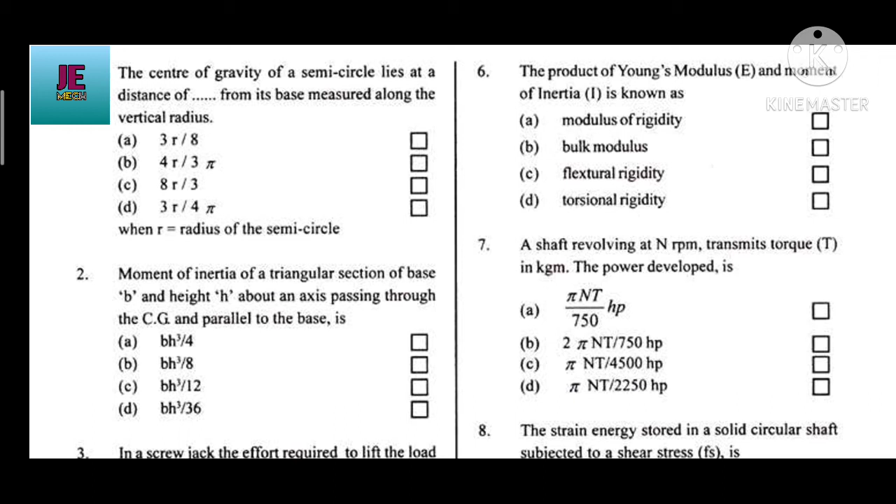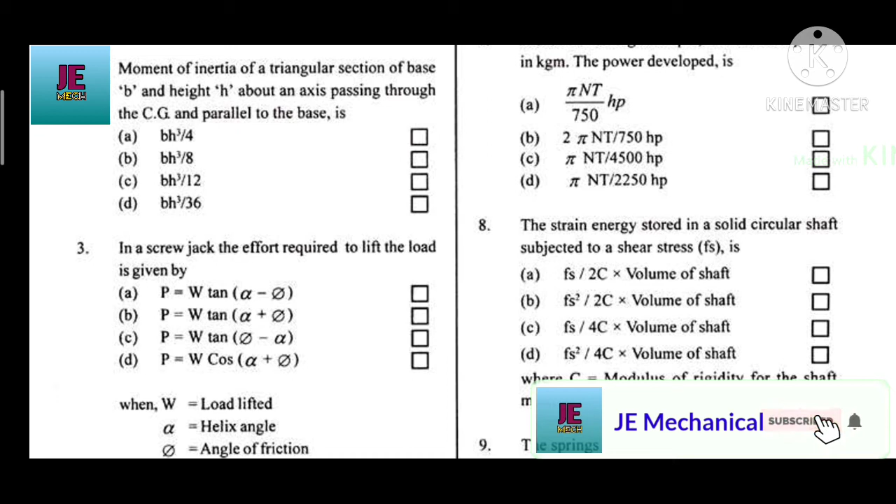B and height h about an axis passing through the CG and parallel to the base is bh³/36. In a screw jack, the effort required to lift the load is given by P equals W tan(alpha plus phi). The angular velocity in radian per second of a body rotating at n rpm is, answer, pi n/30.

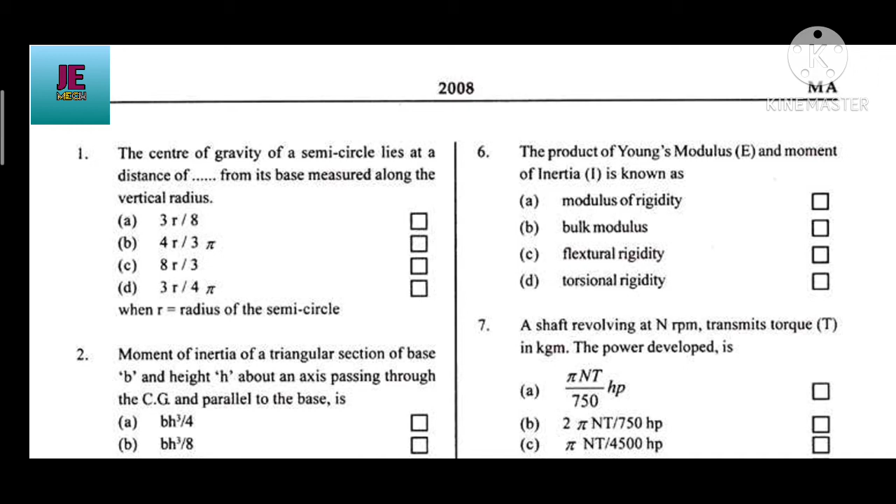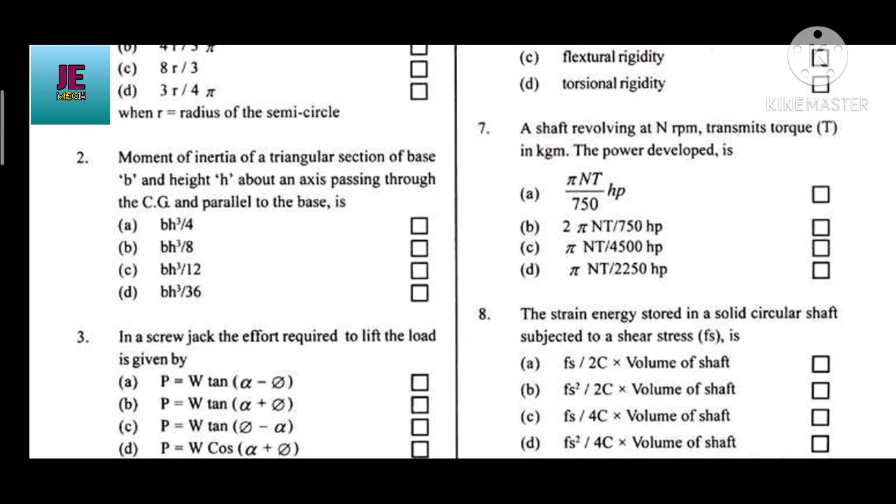A shaft revolving at n rpm transmits torque T in kgm. The power developed is pi nT/2250 hp. The main formula is 2 pi nT/4500, so simplifying it gives pi nT/2250 hp.

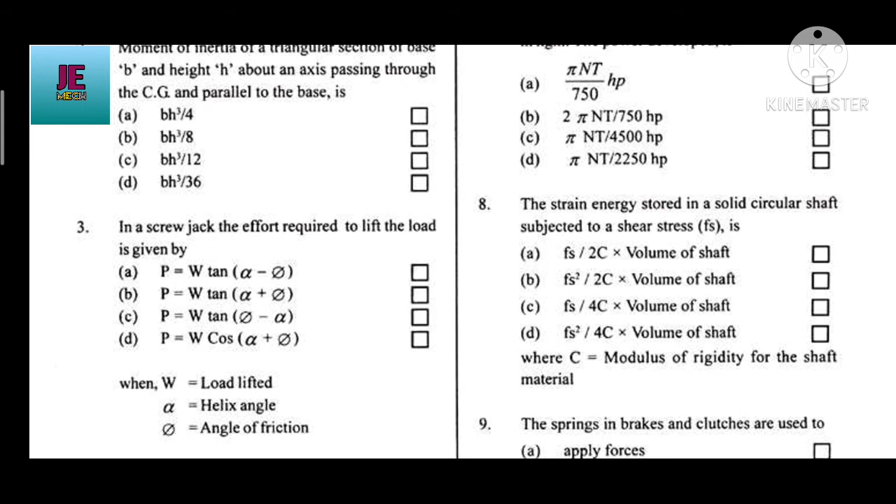The strain energy stored in a solid circular shaft subject to a shear stress is Fs²/4C into volume of shaft. C is equal to modulus of rigidity for the shaft material. Number 9, the springs in brakes and clutches are used to apply forces. A thin cylinder shell is subject to internal pressure. The ratio of longitudinal stress to hoop stress developed in the shell is 0.50.

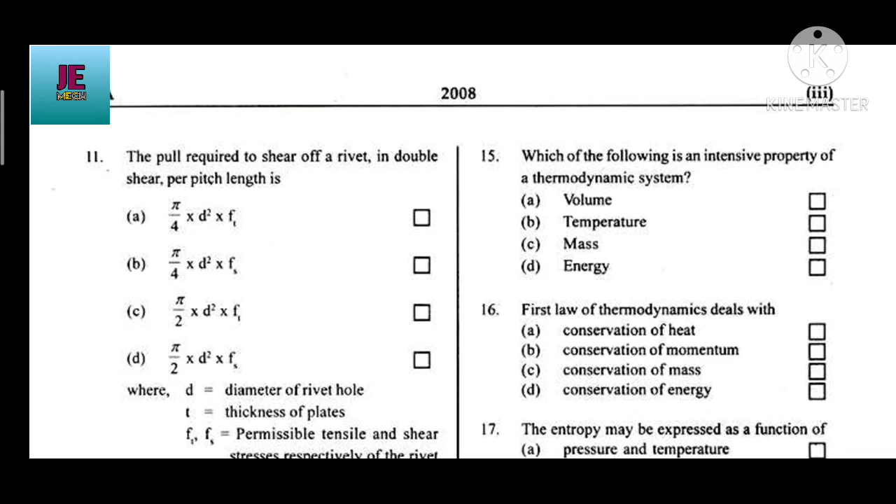Number 12, a glass tube of small diameter d is dipped in fluid. The height of rise or fall in the tube is given by 4 sigma cos phi by wd. W is the specific weight of fluid, sigma is surface tension, phi is the angle of contact of fluid surface. A fluid having no viscosity is known as ideal fluid, and with viscosity it is called real fluid. A definite area or space where some thermodynamic process takes place is known as,

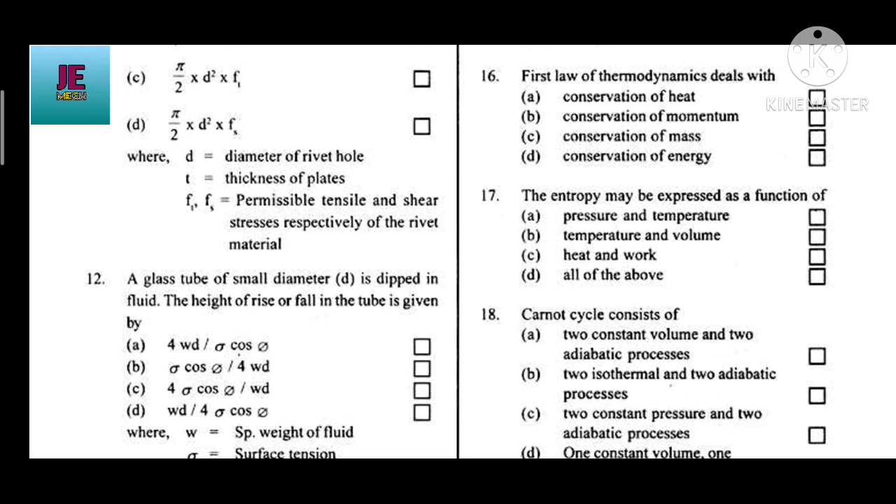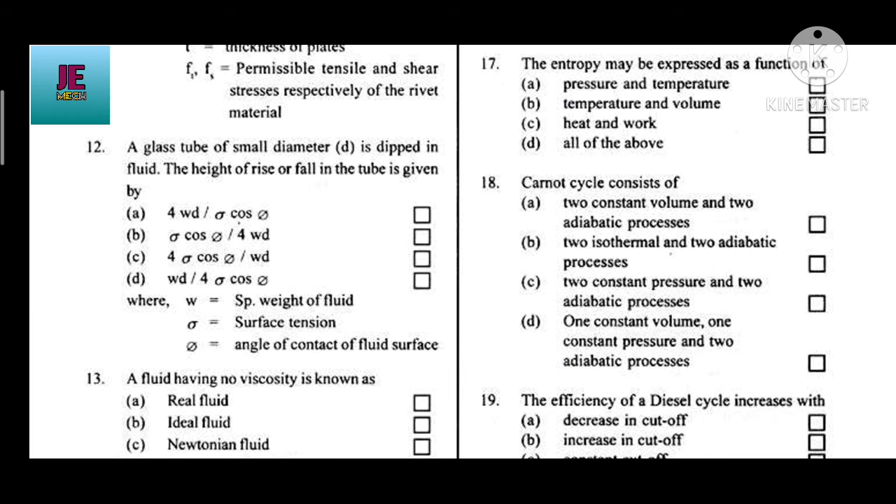Number 17, the entropy may be expressed as a function of pressure and temperature. Carnot cycle consists of two isothermal and two adiabatic processes. Number 19, the efficiency of a diesel cycle increases with, answer A, decrease in cutoff. 20, theoretically a 4-stroke cycle engine should develop half the power as that of a 2-stroke cycle engine.

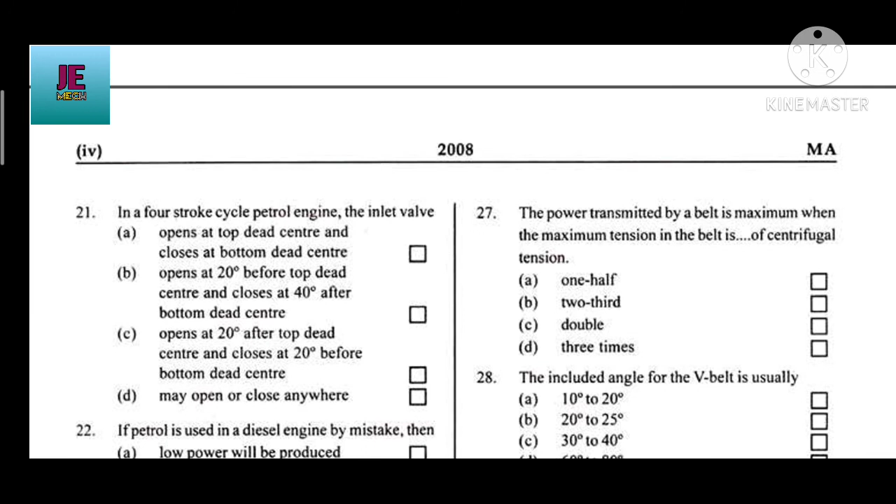Next, in a 4-stroke cycle petrol engine, the inlet valve opens at 20 degrees before top dead center and closes at 40 degrees after bottom dead center. 22, if petrol is used in a diesel engine by mistake, then answer C, higher knocking will occur. The carburetor is used to supply petrol and air. A higher compression ratio causes D, any one of the above: pre-ignition, increase of detonation, and acceleration in the rate of combustion.

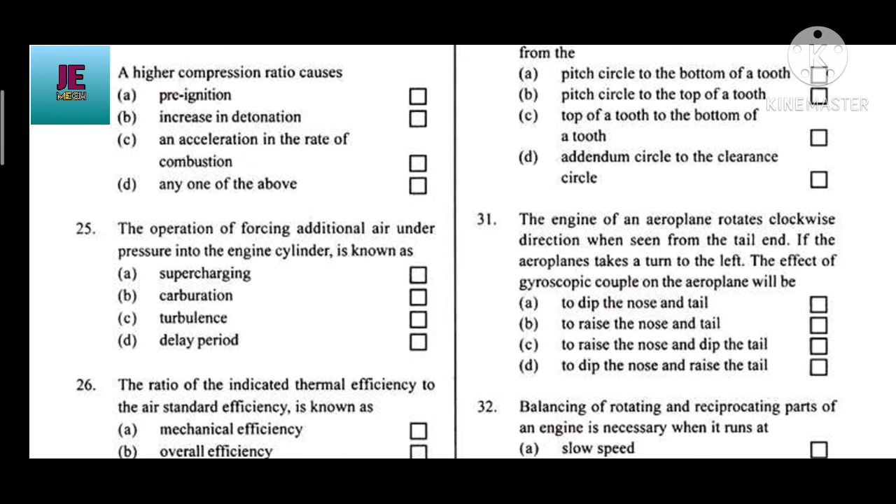Next, the operation of forcing additional air under pressure into the engine cylinder is known as supercharging, carburation, turbulence, or delay period. Supercharging. 26, the ratio of indicated thermal efficiency to the air standard efficiency is known as relative efficiency.

27, the power transmitted by the belt is maximum when the maximum tension in the belt is 3 times of the centrifugal tension. Next, the included angle for the V belt is usually, answer হবে 30 degree to 40 degree.

29, the arrangement is called bevel gearing when two dash are connected by gear. Answer হবে A, intersecting and coplanar shaft. 30, the working depth of the gear is radial distance from the addendum circle to clearance circle.

31, the engine of aeroplane rotates clockwise direction when seen from the tail end. If the aeroplane takes a turn to the left, the effect of gyroscopic couple on the aeroplane will be, answer আছে অপশান আছে to dip the nose and tail, to raise the nose and tail, to raise the nose and dip the tail, না to dip the nose and raise the tail. Answer হবে to raise the nose and dip the tail.

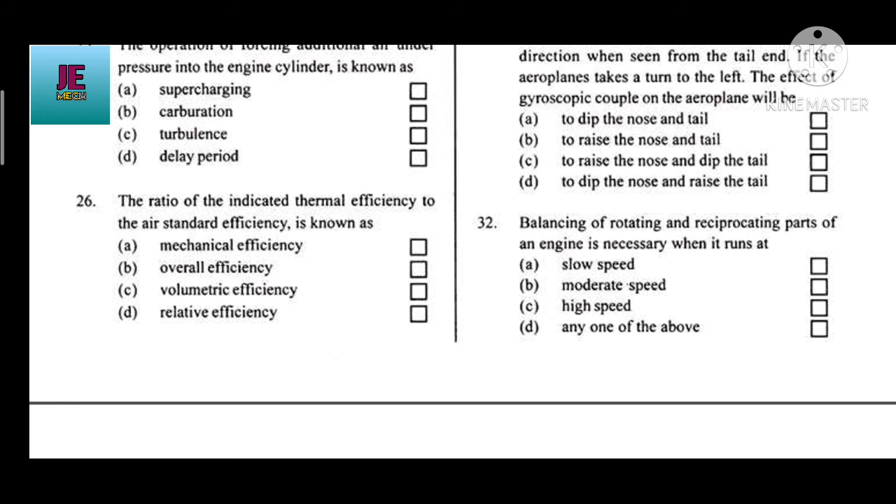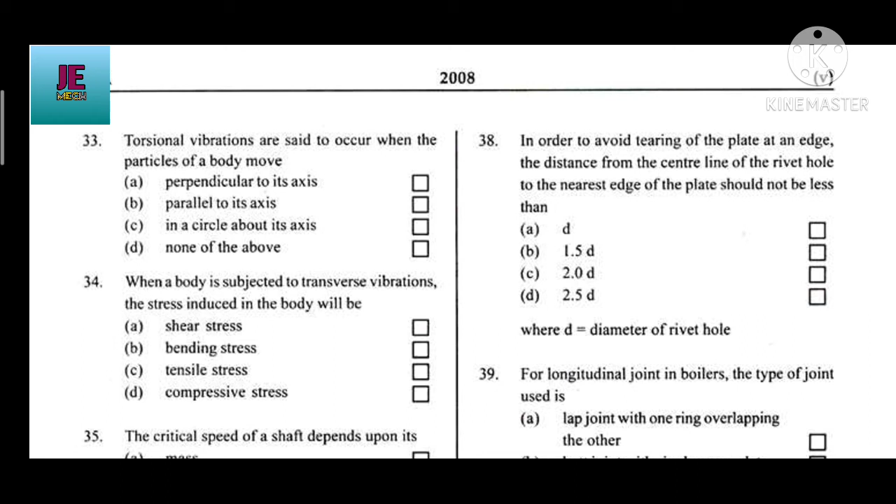C answer হবে. 32 নম্বর, balancing of rotating and reciprocating parts of an engine is necessary when it runs at high speed. 33, torsional vibration are said to occur when particle of the body move. Answer হবে C, in a circle about its axis. 34, when the body is subject to transverse vibration, the stress induced in the body will be bending stress. The critical speed of a shaft depends upon its C, mass and stiffness.

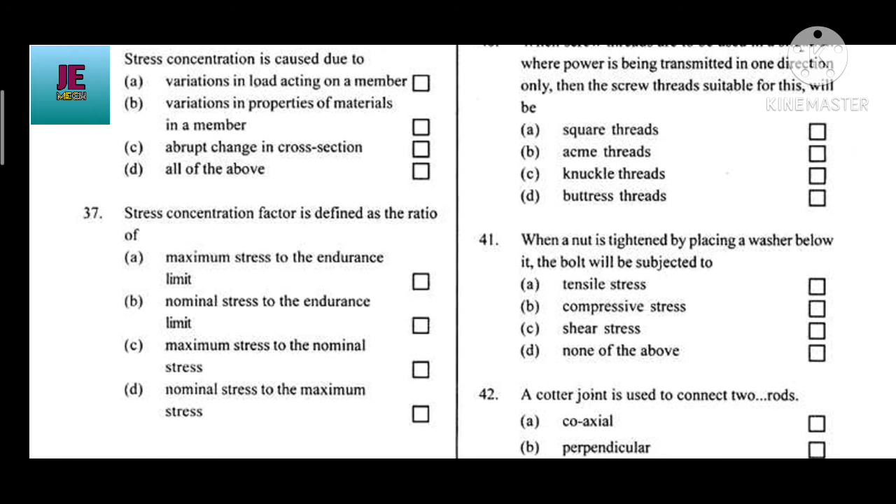36, stress concentration is caused due to abrupt change in cross section. 37, the stress concentration factor is defined as the ratio of maximum stress to nominal stress. 38, in order to avoid tearing of the plate at an edge, the distance from the center line of the rivet hole to the nearest edge of the plate should not be less than 1.5 D. For longitudinal joint in boiler, the type of joint used is butt joint with double cover plate.

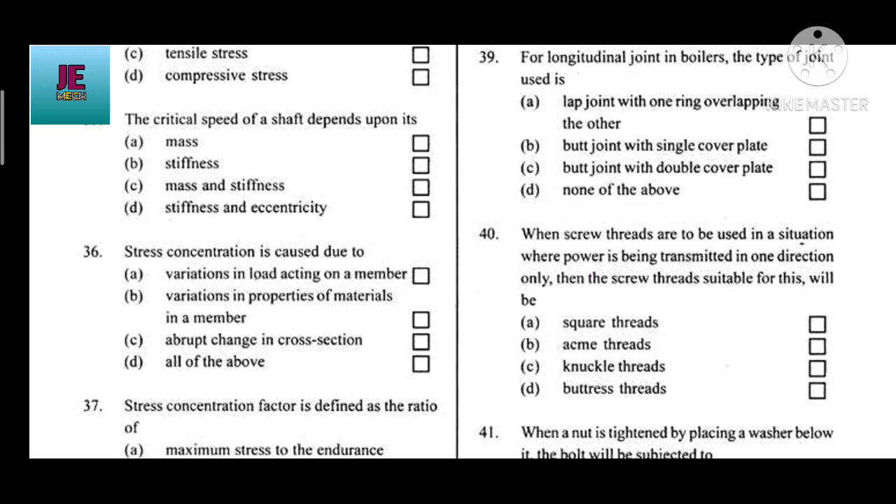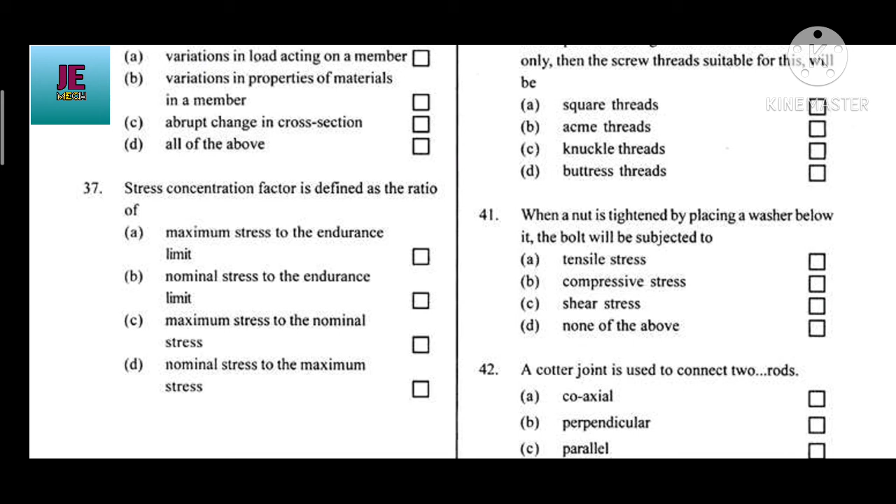40, when screw thread are to be used in a situation where power is being transmitted in one direction only, then the screw thread suitable for this will be buttress thread. 41, when nut is tightened by placing a washer below it, the bolt will be subject to tensile stress. 42. A cotter joint is used to connect two rods coaxial.

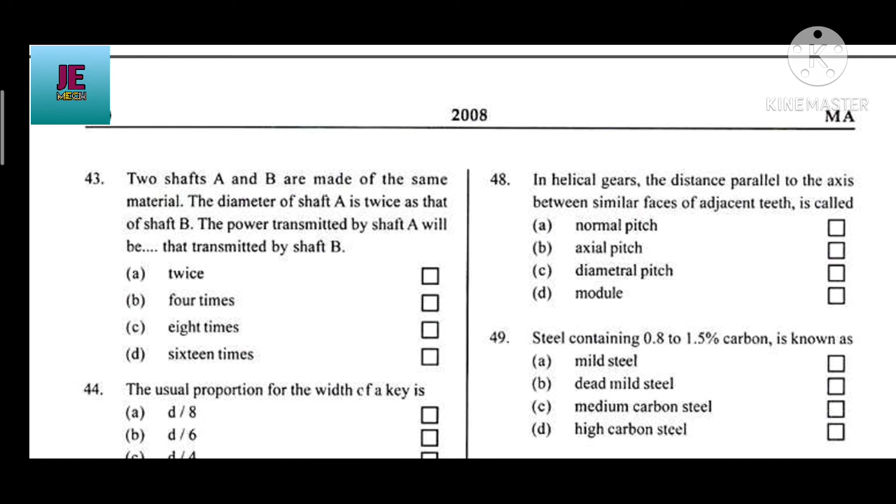43. Two shafts A and B are made of the same material. The diameter of shaft A is twice as that of shaft B. The power transmitted by the shaft A will be dash that transmitted by the shaft B. Answer হবে 8 times. 44. The usual proportion for the width of the key is D by 4. Idler pulley is used for applying tension.

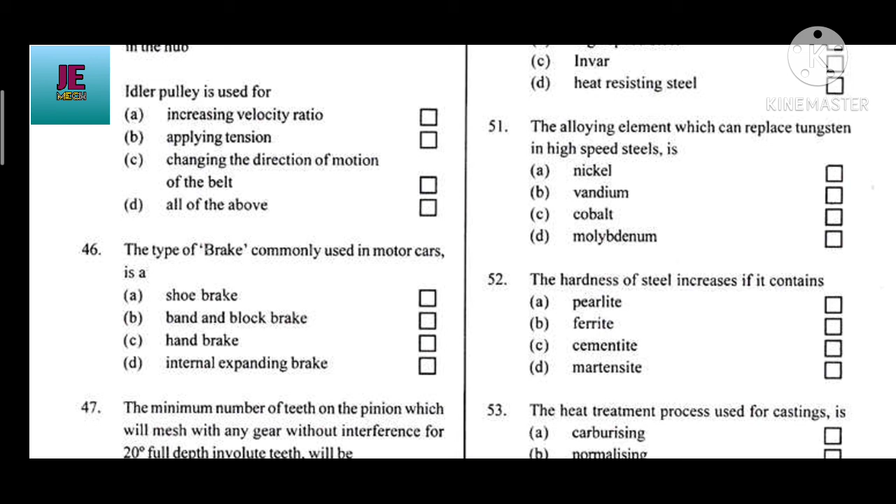46. The type of brake commonly used in motor cars is an internal expanding brake. 47. The minimum number of teeth on the pinion which will mesh with any gear without interference for 20-degree full depth involute teeth will be 18. 48. In helical gears, the distance parallel to the axis between similar faces of adjacent teeth is called B, axial pitch. Steel containing 0.8 to 1.5% carbon is known as high carbon steel.

A steel alloy containing 36% nickel is called invar. The alloying element which can replace tungsten in high speed steel is molybdenum. The hardness of steel increases if it contains cementite. 53. The heat treatment process used for casting is normalizing. 54. An alloy of copper, tin and zinc is known as gunmetal.